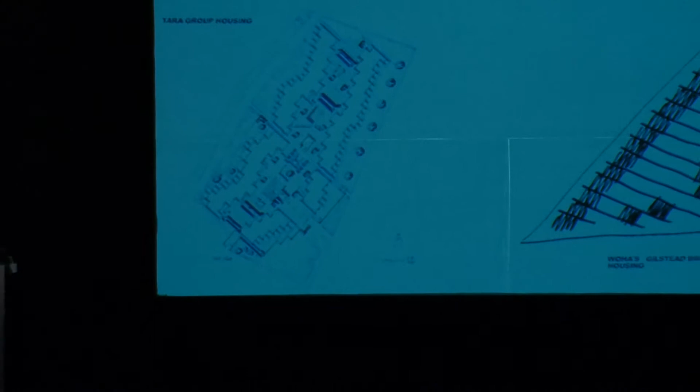As I was looking at the book before I came, I was actually interested, because I hadn't looked at it, I have to say, for maybe 15 years or so, and in my head there was a little bit of blurring between Charles Correa, Geoffrey Bawa, Luis Barragan from Mexico. There were a lot of similarities between all these architects in the way they were exploring identity and modernism and dealing with climate and their historical, cultural references as well.

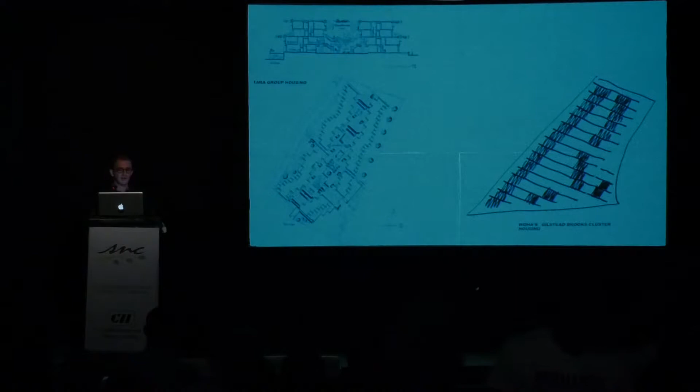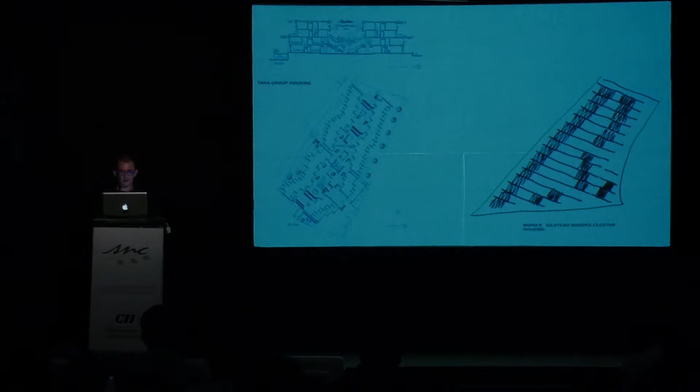So I was really shocked actually to see these couple of housing projects of his and how we had done projects that had obviously drawn very much on their organizational strategies and geometric DNA. So this Tara housing project from very early in his career, using this idea of the terrace strips of geometry and then adjusting the geometry to create something quite loose and organic, we used in our Gilstead Brooks cluster housing project. And in the next slide, also the PREVI experimental housing project for Peru, I think.

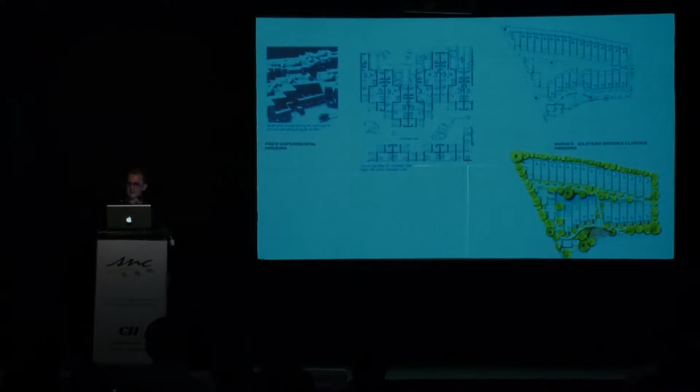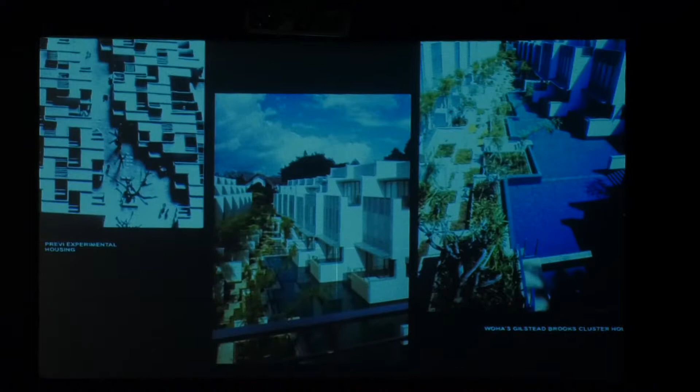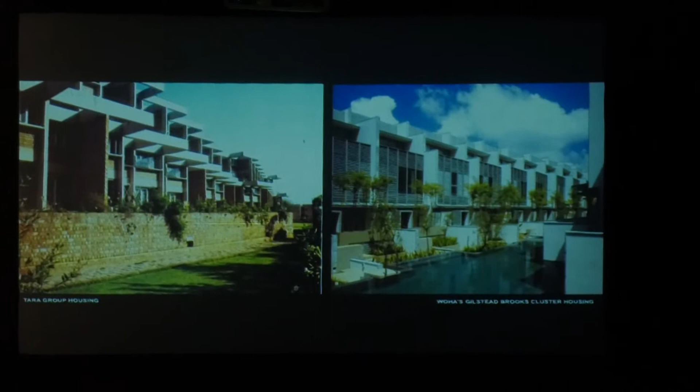So you can see the plan from Charles Correa on the left and our plan on the right. It's exactly the same strategy. And you can see here a photograph of the model of that housing project and our built project in Singapore. Similarly, a view of the Tara group housing project and another view of our Gilstead Brooks cluster housing project. So it was around, I think, 30 years later, we were exploring very similar ideas. And some more views of it here.

Similarly, I think, this interest in cubic modernist compositions, something very obvious in the images that Kamal was sharing with us about composing facades as something quite abstract, and using openings and profiles, is something that we have explored a lot in our work too.

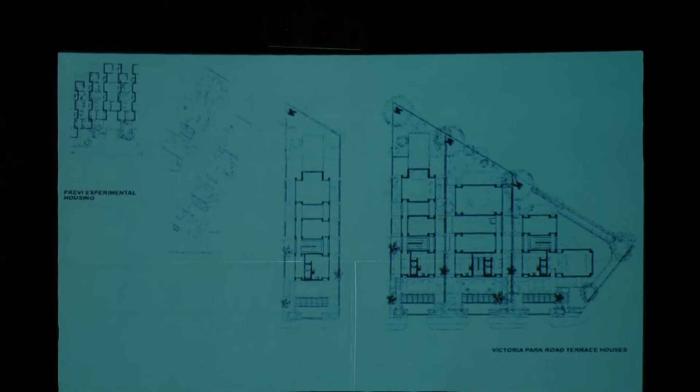Then again in plan, Charles Correa's project on the left, this very interesting zippered, interlocked plan. Any architect who's worked on terrace housing projects realizes there's a kind of tyranny of the party wall where you can't seem to escape from it and you're stuck to the wall, and it makes you accelerate too quickly through the space. So this is a very smart plan of his which breaks that linearity of the wall and helps create a sequence of stable spaces rather than this corridor-like feel.

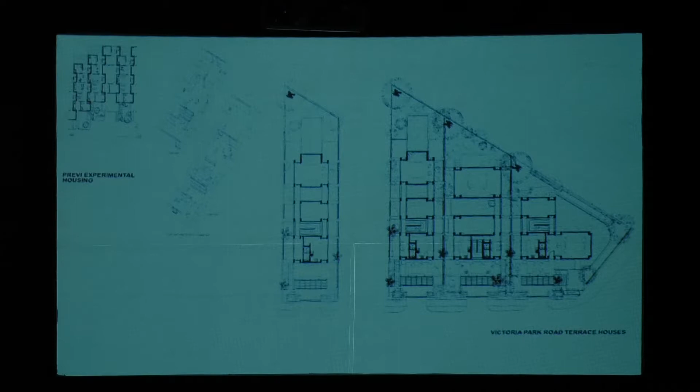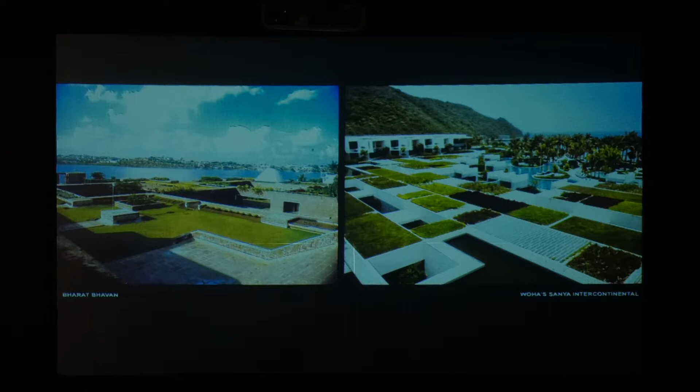Another really important influence of Charles Correa's work, I think, is the treatment of a large architectural compound as more of a landscape. And I think you can see here in this Bharat Bhavan image something that has very, very direct descendants in our work. For instance, our InterContinental project on the right, you can see exactly the same strategies of treating a roofscape as an abstract landscape.

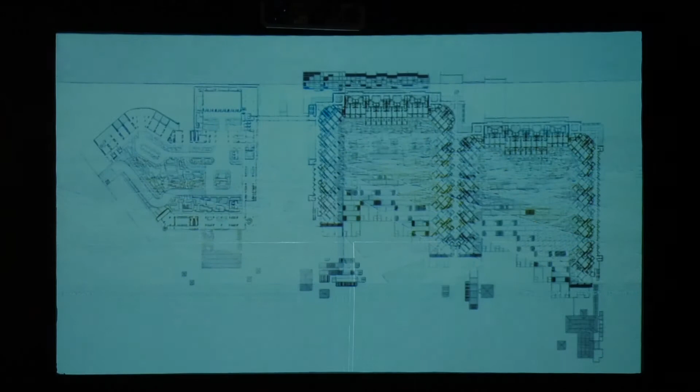This is the plan of that hotel project, and again, I think this idea of an ideal courtyard and a sense of playing with very pure geometries but making something informal within them is expressed very clearly in this project.

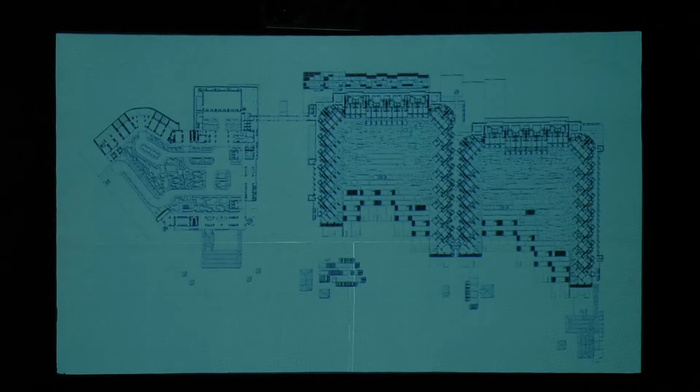There's another aspect of his work which I think is really interesting, which is this painterly aspect where walls are not only part of three-dimensional objects but sort of collapse into two-dimensional surfaces which you can then manipulate using paint and people's expectations of architecture to create this delightful shift between what's real and what's imagined or projected on the wall. And that's something that in our projects, in a more abstract way, we've been always using: paint as a way of helping to change your perception of the reading of a form or architecture.

The final project that I think is really super influential on us is the Kanchanjunga Apartments in Mumbai. And this one is always the project of his that I remember most clearly in my head, and I think has been something that we've drawn on very, very directly. And when I first came to Mumbai to work on our project there, and by chance saw the project in the city, I was really excited, like I'd seen a sort of movie star in the city streets.

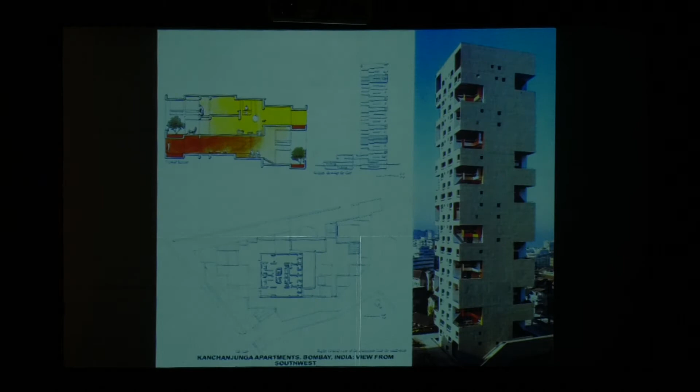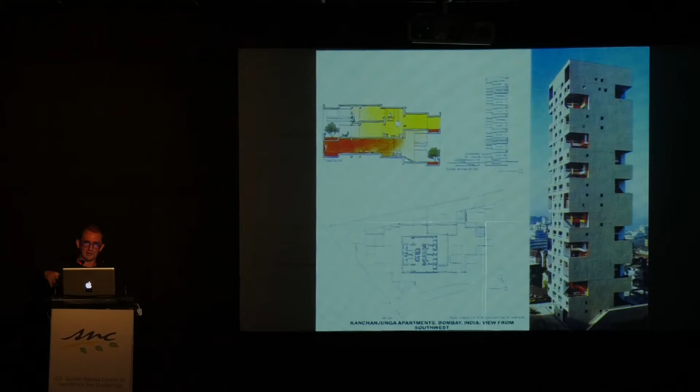And I think this idea that a high-rise building is not just an engineered object which is filled up with accommodation, but is something that can be quite an interesting spatial experience, is something that's really important, I think, in terms of a breakthrough. The high-rise form evolved in Chicago and in New York in very harsh climatic conditions, and has in a way always been led by engineers as something that was a technical problem to solve. How much can you solve circulation using lifts? How do you solve mechanical problems? How do you solve facade problems? And architects, to a great extent, were then brought in to style this object in various fashionable ways.

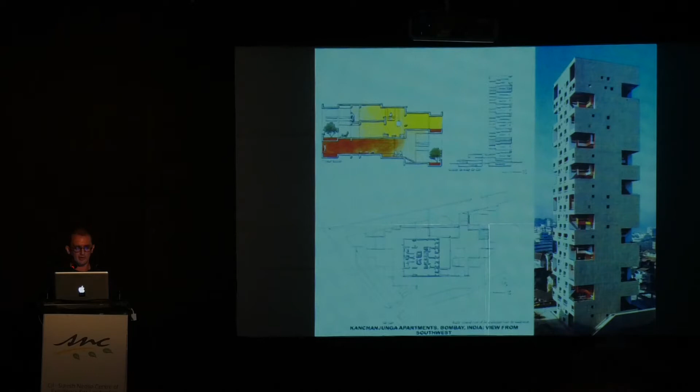So I think this project showing that there's no need to abandon all the ideas we have about space, about creating sequences, about volumes. These don't have to be abandoned in a high-rise, and that there can be this interaction of inside and outside volumes has been something that we have been exploring with a lot of passion and excitement over the years. And this image from the book is something that's in a way defined that vision for us for the last 25 years.

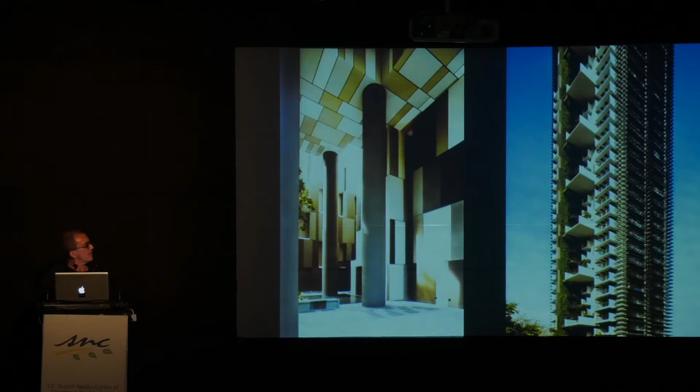Just an example is something from our work a few years ago, but here you can see that idea of the painted architecture. We had so many people ring us with this project: Oh, what did you use for the facade? And we were saying, oh, it's paint. Because at that point, I think everyone was using all kinds of metal cladding and things. We had no budget for it. But the idea that paint could transform a simple cheap surface like plasterboard or a plastered wall into something you read quite differently, I think also is directly from Charles Correa. And you can see on a distant view of it on the right hand side, these gardens hanging in the air are a direct descendant of the Mumbai apartments.

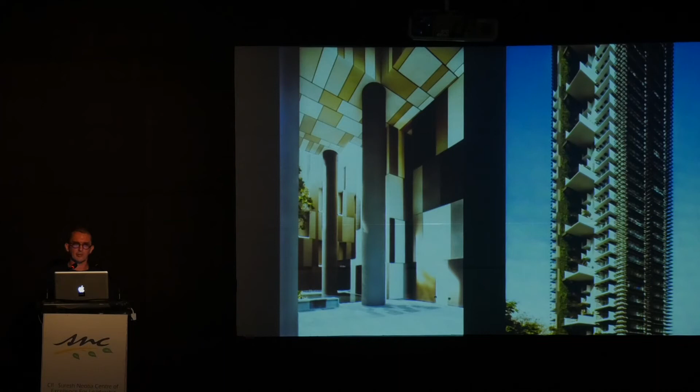I'm now going to show 3 projects that we finished recently, which I think take these ideas quite far. And I'll also show you just a few photos of our projects in Mumbai, because I think it's always very different working in every country. So I can share a little bit about the challenges and the opportunities that we see when we work in the Indian context.

So the first project I'm going to share is the Parkroyal on Pickering, which we designed in 2007. So it's actually 10 years since we conceived of this building. And the page I'm showing you here is from our book, so I've brought a copy along to present to Mr. Neotia after the talk. But for us it was an interesting book to do because we examined, in terms of strategies across projects, what we were doing, and we're very keen to share these strategies because we think our ideas or our solutions could be important in solving some difficult problems that we're having in cities. So what we do in the book is as we introduce a project, we show the strategies and then also some ratios that we think are very important.

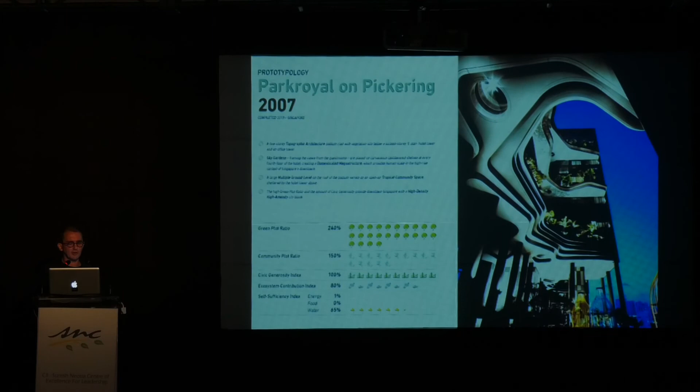I'll just talk about the ratios because I think we have limited time, but all our projects we've started evaluating under these ratios. So we have green plot ratio, community plot ratio, a civic generosity index, ecosystem contribution index, and a self-sufficiency index. And the reason we introduced these ratios or indices in our book is because we felt these were really important things that in some way need to balance the other ratios that we get put in front of us all the time, usually by developers or by city officials, things like net to gross ratio, surface area to volume ratio, because these ratios are actually economic ratios, which are a measure of a certain kind of efficiency. But often they're directly in opposition to the end user experience.

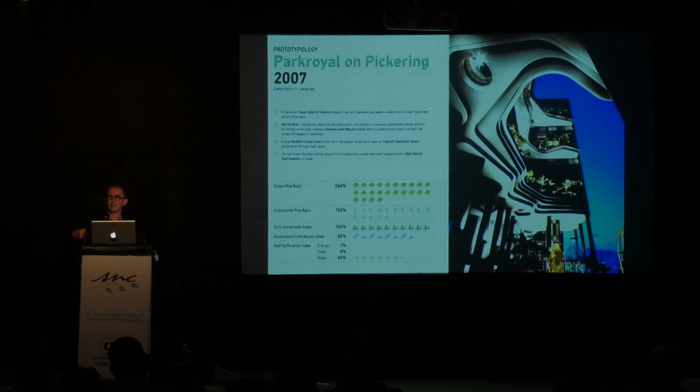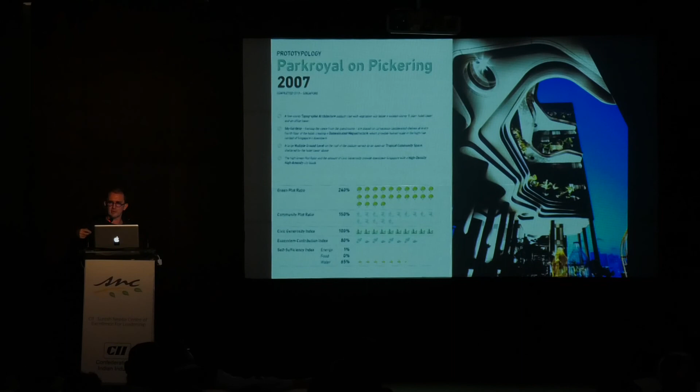But the problem is because they're the only ratios talked about, they seem to gain their own kind of virtue, and people say, oh, my building's got these great ratios, it must be a great building, when actually it might be quite an unpleasant building, but a very cost-effective building. So green plot ratio is a simple measure of the area of greenery as a comparison to the area of the site. And where we're quite excited in our projects is we're starting to get quite huge ratios here. So in this case we have 240% green plot ratio, which means we have almost 2.5 times as much garden as if we didn't build the building at all and left the site empty.